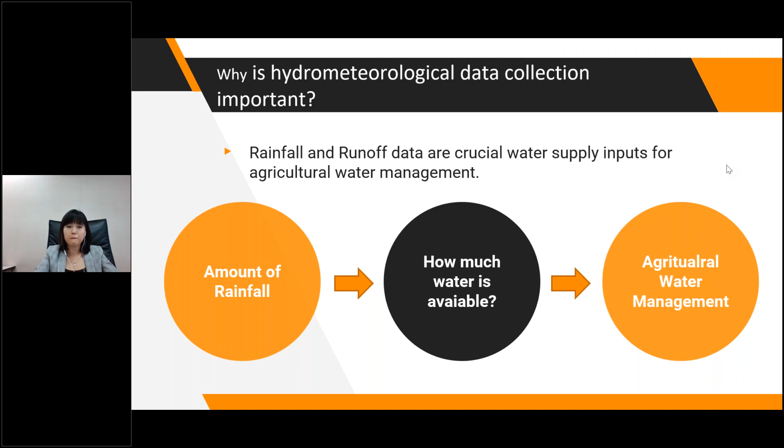The next question is how to know whether the water supply is sufficient or not. The answer is you have to measure the data. If you need to know how much rainfall, just install rain gauges on the ground in your own area as much as possible, and also install staff gauges in the river or in the storage you need, then convert the measured water level data into water volume, so you can obtain two sources of water supply data. Next, please.

Unfortunately, it is impossible to install a very dense measuring network for every location in Thailand. We have rain gauge density ranging between 200 to 700 square kilometers per gauge. Based on this limitation in data measuring across the country, this quite poor density of measurement in some areas could lead to mistakes in water management if the ungauged area has high variation in rainfall and runoff behavior. Next, please.

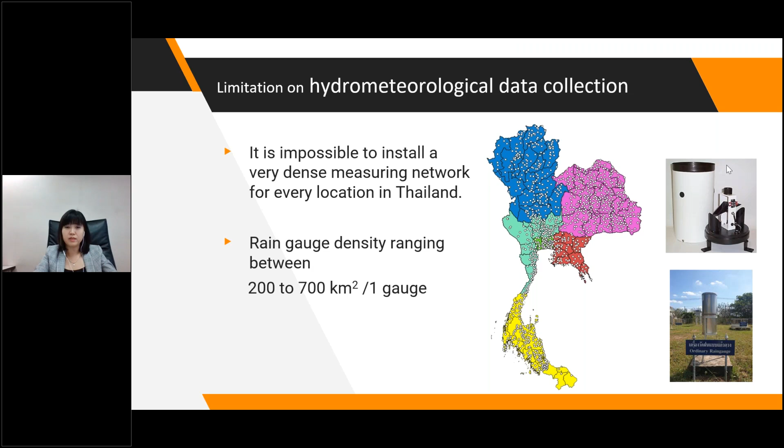So citizen science measurements would be an exciting optional solution to increase the density of measuring networks. If we can ask local people to help measure rainfall, water level, or even water quality in different locations covering our field, it would directly benefit agricultural water management. Next, please.

And how can Dutch innovation help measure this? What we have been looking for is an easily accessible and reliable technology for local people to learn and use to measure. Many thanks to Delft University of Technology for introducing mobile application technologies developed by MWM, Mobile Water Management company in the Netherlands, for application in some places in Thailand. Next, please.

Next, just start measuring by taking a picture from the rain gauge or staff gauge. The picture will automatically be sent to the cloud, and the app will convert the picture into digital data. Both digital and image data will be translated and stored in the database and could be displayed in MWM's dashboard. We can finally download the analyzed data for integrating with the hydrological information system of your choice.

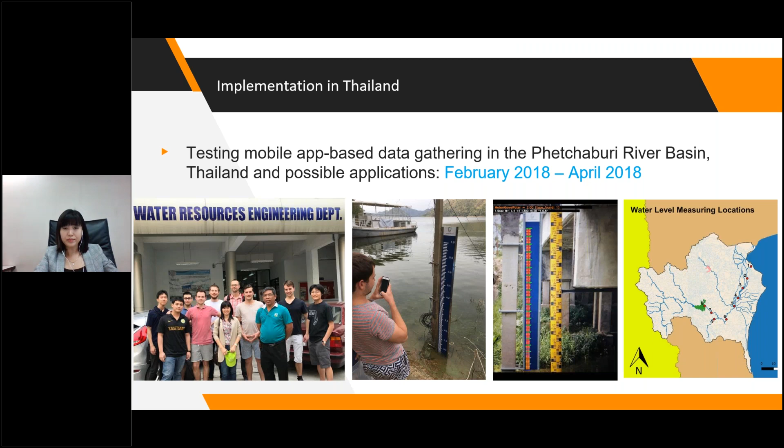In continuous collaboration with TU Delft and MWM, we moved to another basin of Thailand located in eastern Thailand to test the ability of rain gauge measurement, and we successfully expanded the rain gauge density covering the study area. We keep contacting local people for measuring the data since September 2018 until now.

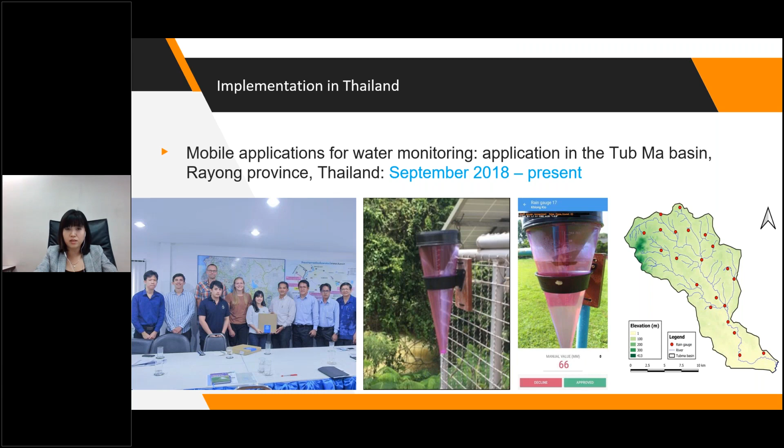The final thing I would like to talk about is the opportunities for integrating the CS data with agricultural water management. Since the CS data is not automatic recording, we should integrate the data with advanced technology such as weather radar for obtaining high resolution of rainfall in terms of temporal and spatial resolution. We can put this high quality data into the mathematical model for runoff simulation in any place where we need to know the water supply. This high quality data could finally improve the accuracy of agricultural water management in the future.

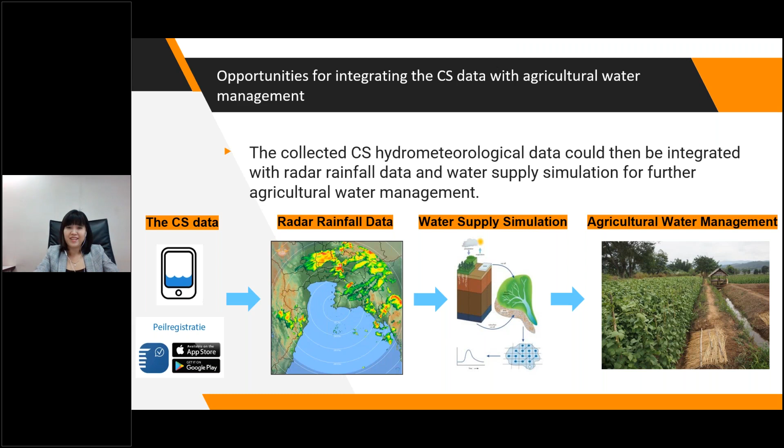Next, please. And thank you very much for your attention and your time.

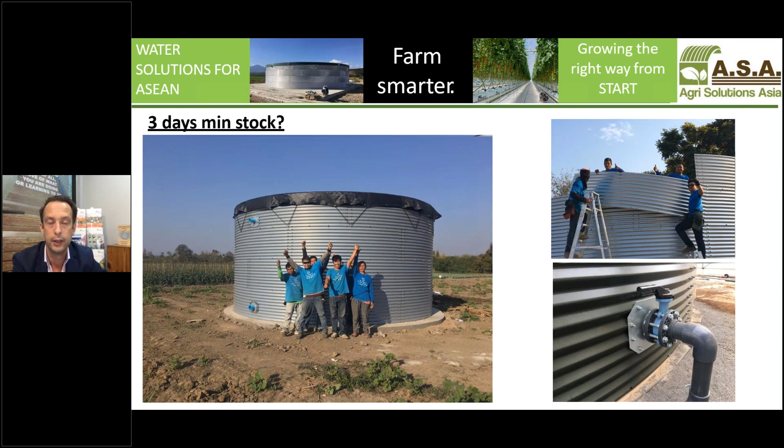Many people ask us, we want to grow, and I ask them why. If you can't be successful and make money, you're not going to be successful in growing, so why not make it successful? We help people with a concept where you can not only grow but also make money. If there are any growers here joining today, it's very difficult to make money in business, and that goes the same for agribusiness.

So most people choose to have a proof of setup, and that's what our company has with the experience of tomato growing.

What we actually do is control the climate inside the greenhouse, and we also irrigate. For that we use an irrigation unit that gives a flexible solution to irrigate whenever the plant needs it, not because we find it needed at 9 o'clock, but based on sunlight and the amount of radiation from the sun.

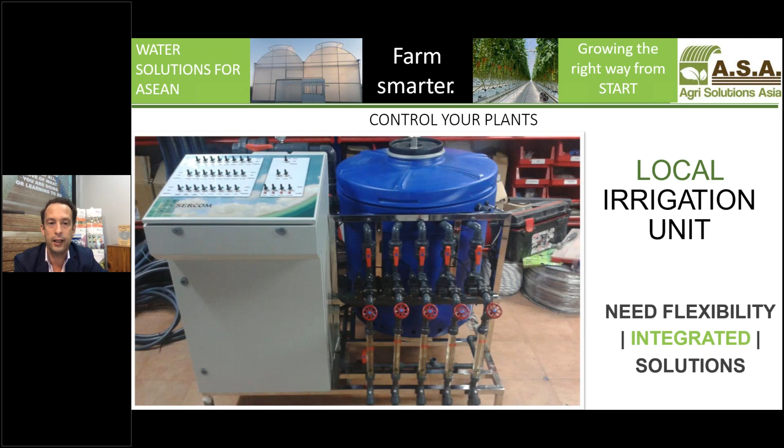So all the fertilizer levels are balanced and optimized for the plant.

When we use the gutters, we recollect the drain, pass it through a simple filter system again, and then mix that with rainwater or government water, whatever you have. In that way we solve wastage, so we have 100% usage of water and no waste.

In that way you can drip irrigate and really precisely give the plant what it needs without wasting water. These installations are sometimes a little more expensive than just irrigation, but with this solution...

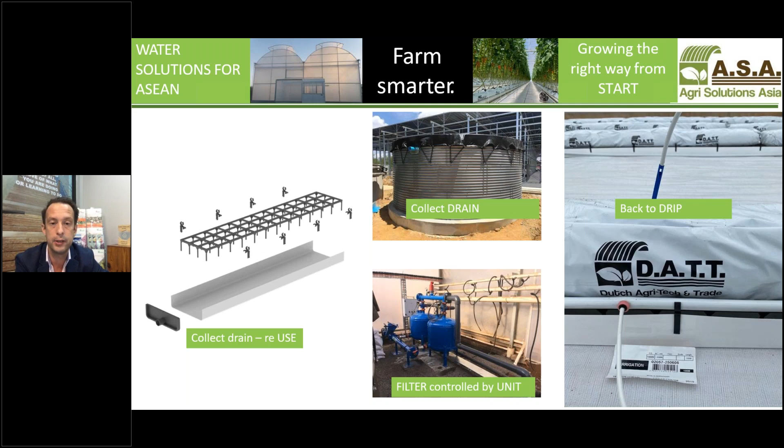With this solution we can also control the temperature inside. With all these controls, you're able to invest more and get more out of your greenhouse because you have plant control. So the question to you all is, if you grow, can you manipulate your plant?

And if you are not able to say that, then you probably are, but maybe not in a positive way. And what we want really, and this is a picture here in our farm, is that you can manipulate the plant and make money.

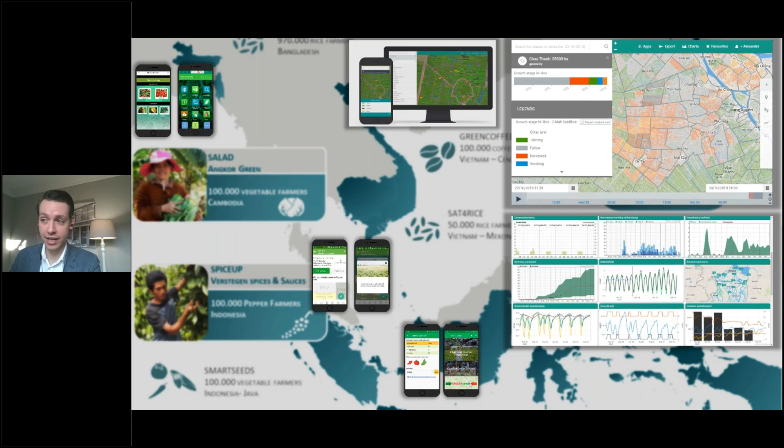Thank you, Mr. Alexander. I think it's very valuable to know what the weather's going to do. I think most of us have experienced the moment you went home through the rain, and by the time you got home it's dry again, so you know you could have waited a bit more.

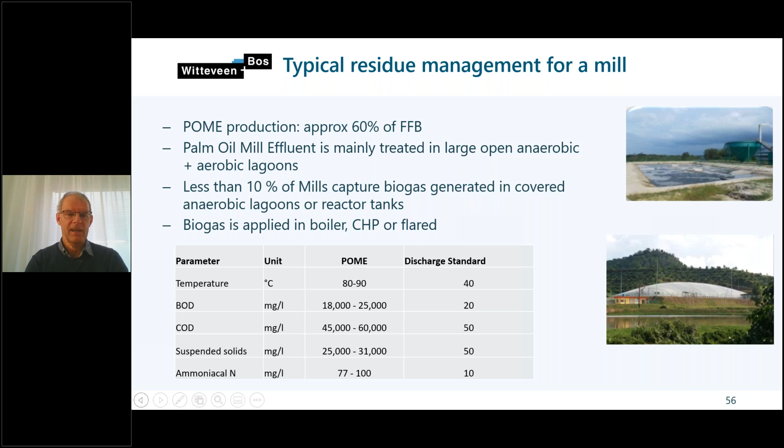The more stringent discharge requirement requires treatment. First of all, the anaerobic treatment is a good technology. It saves energy, it produces energy, and it can be done in various ways.

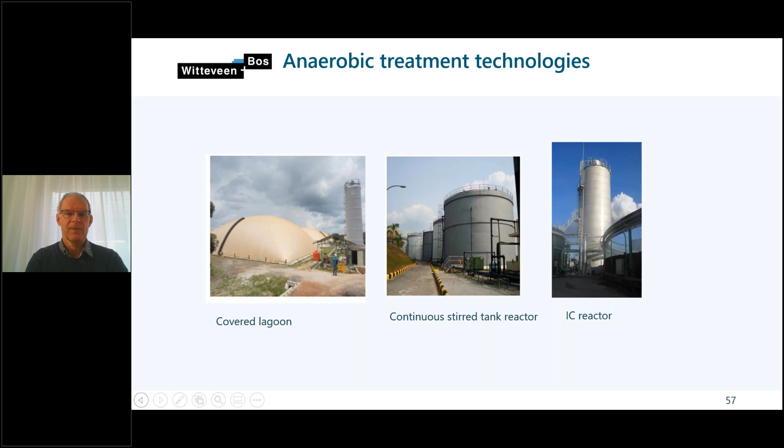Next slide, please. Then we come to the water use. How much water is a mill using? Typically, we found for all the mills we investigated, between 0.6 and 2.0 cubic meter per ton FFB.

Usually they extract the water from surface water as the main source, river or lakes, and very few are on artificial reservoirs, groundwater. But what we see is that the quality and even also the quantity you can extract varies during the year. Sometimes in rainy season, a lot of suspended solids in the water, and in dry seasons, even too little water, so that they have to reduce the capacity of the mill or look for other sources.

The main water use in the palm oil mill is for steam production, and therefore you need quite clean water. Every mill has its own water treatment plant to produce the boiler feed water, including reverse osmosis with membranes.

In all the plants we visited, there is no or hardly any reuse of treated POME, mainly because the quality after treatment is still not sufficient. It is sufficient for discharge, but not sufficient to produce boiler feed water via reverse osmosis, and there is also no experience how to treat it up to boiler feed water standard. In fact, it's possible to have zero discharge and reuse all the treated POME to produce boiler feed water and other technical water.

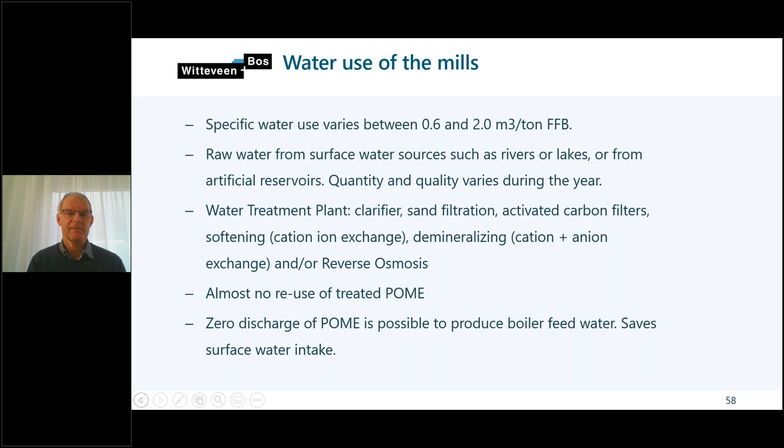This is an example we already built 10 years ago. It's an operation where we focus on production of boiler feed water with very low dosing of chemicals and limited cleaning of the ROs. Cleaning of the RO is usually required because of biofouling on the membranes. We developed the system mainly to prevent the biofouling and to increase the lifetime of the membranes, to save costs.

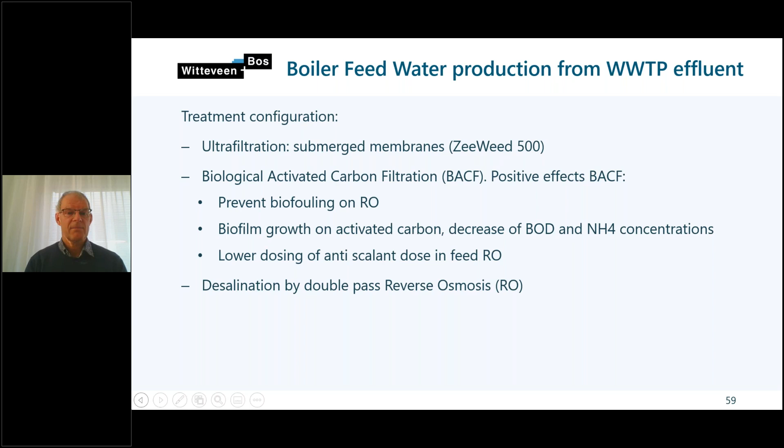This is how the process configuration of the effluent recycling plant looks like, for a quite large capacity. The intake is 11,200 cubic meters per day, so you see multiple trains. That's not required because the palm oil mills have a smaller capacity.

We use the treated effluent with the quality for discharge. The first step we applied is submerged ultrafiltration. Then we have what we call BACF, a biological activated carbon filter. Afterwards, the RO—in this case we used 2 double pass RO, but in many cases 1 pass RO is sufficient.

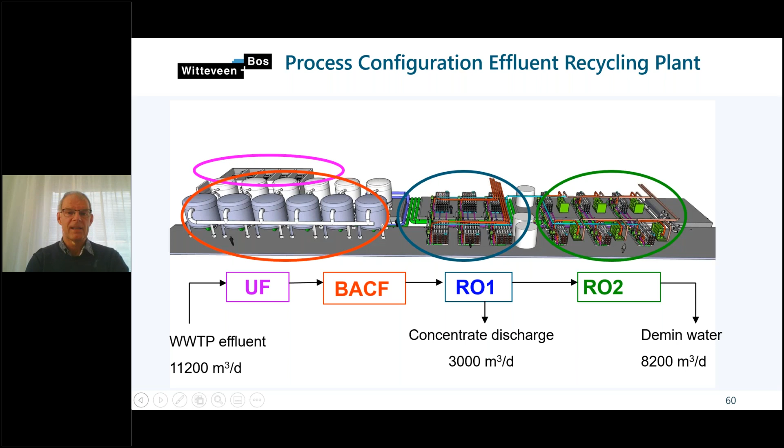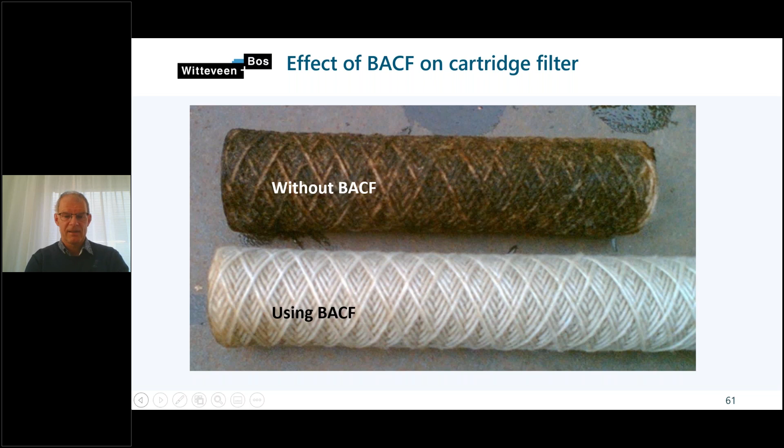This is because the biological activated carbon removes all easily biodegradable carbon, BOD, COD, and oxidized ammonia present in the effluent. It lowers the concentration of growth-limiting substrates like BOD and nitrogen, so there is no substrate for any bacteria in the RO feedwater.

How do we operate this biological activated carbon? Because we want to grow a biofilm on it, the biological activated carbon is not used for removal of suspended solids—it's only used to attach biofilm on the activated carbon.

We backwash only once or twice a week, and the second stage BACF only once a week. We only dose antiscalant, and no biocide dosing has been used for the past 10 years. The CIP frequency of the RO membranes is 2 to 3 times a year, only with caustic or hydrochloric acid.

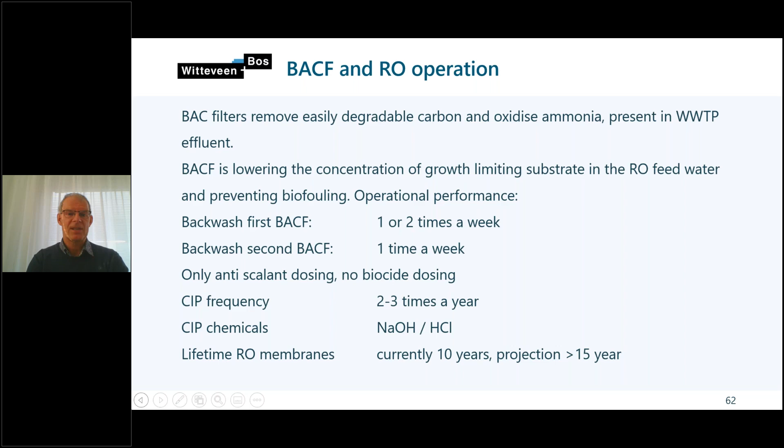Thank you for your attention. This system is not only applicable for palm oil mills, but also for other industrial processes.